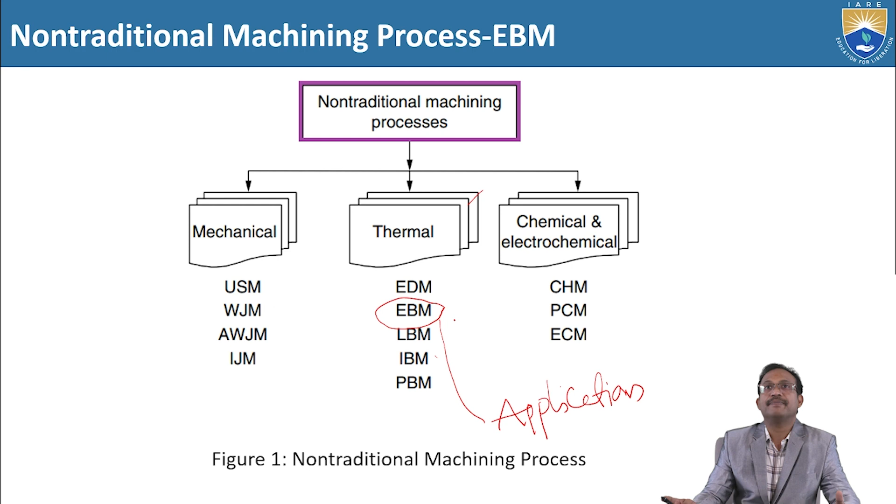Now we are in electron beam machining. Today we are discussing the applications of electron beam machining, which is under the category of thermal non-traditional machining process. So here we are discussing the applications of electron beam machining. Before we discuss the applications, let us discuss the factors affecting the performance of EBM. Subsequently, we discuss the applications of electron beam machining.

Workpiece material properties such as boiling point and thermal conductivity play a significant role in determining how readily they can be machined. So here the machining is a function of two main things: one is boiling point, the other is thermal conductivity of the workpiece material. Next, other thermal properties such as electrical conductivity are considered as additional factors. So the first one is boiling point and thermal conductivity, and the second one is electrical conductivity. These two will play an important role in the performance of electron beam machining.

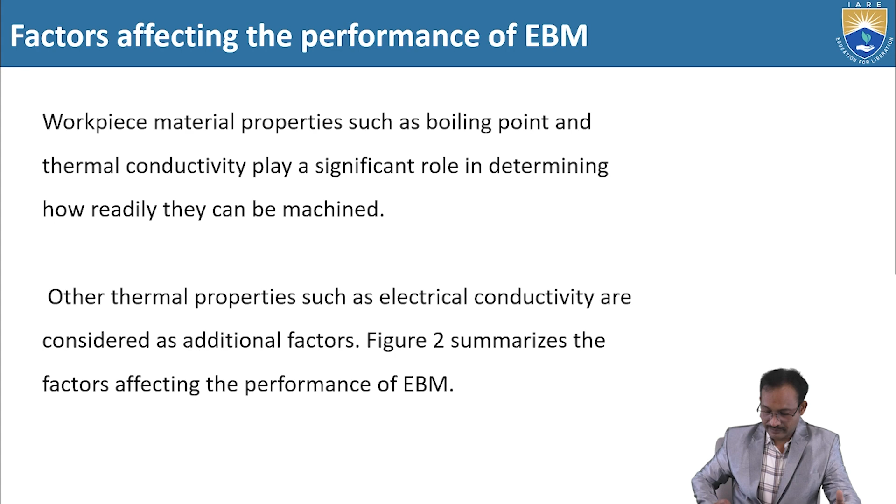These are the parameters affecting EBM performance in detail. Under electron beam machining, removal rate, surface quality, and accuracy are the main outputs. These are the different parameters which influence the performance of this electron beam machining in removal rate, surface quality and accuracy.

Now let us see the working material. Under thermal properties: thickness, ceramic and superalloy. These are the different working materials that can be considered for electron beam machining.

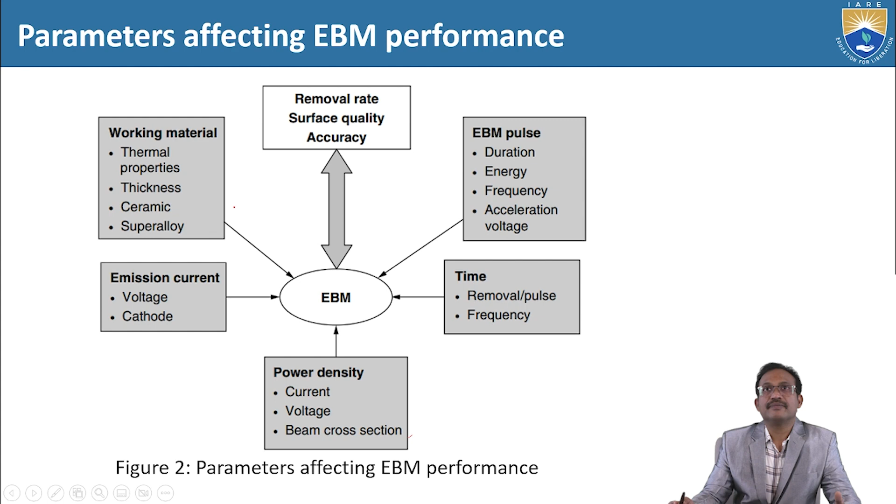Next, emission current, voltage, cathode. Power density, current, voltage, beam cross section, EBM pulse, duration, energy, frequency, acceleration voltage. These are the various parameters associated with EBM pulse, regarding time, removal and pulse frequency. So these are the various parameters affecting electron beam machining performance.

Now let us come to applications of electron beam machining. These are the applications: drilling, perforation of thin sheets, slotting, and integrated circuit fabrication. So these four are the important applications of electron beam machining. Along with these, some other applications are also there, but these four are very much important.

Now let us discuss the first one, drilling. Various researchers and authors have described and expected these to be important outcomes in the research. Steigerwald and Mayer during 1967 considered that for successful application, improved reproducibility, greater working speeds, and deeper holes of accurately controlled shapes are all needed.

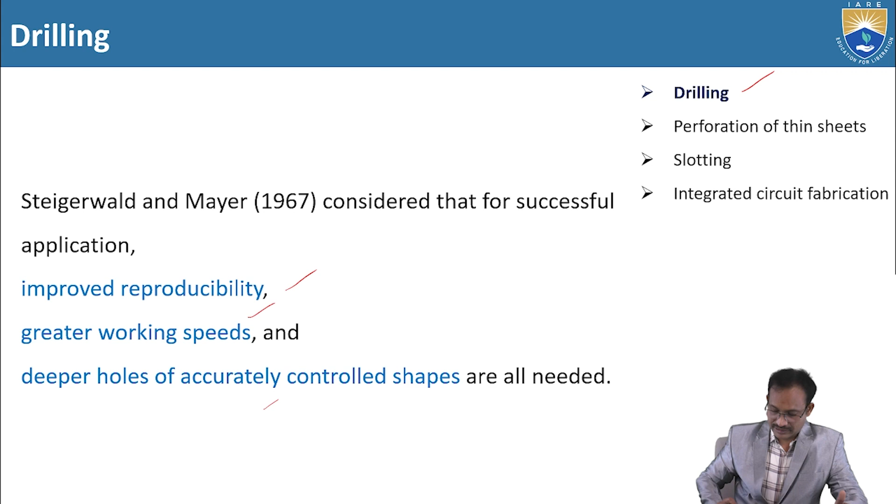During 1983, Boehme discussed drilling applications with an electron beam machining fitted with a system for numerically controlled NC. So here electron beam machining is connected with numerically controlled equipment to control beam power, focus and pulse duration, and mechanical motion. So electron beam machining is equipped with a numerically controlled setup to control the beam power, focus and pulse duration, and mechanical motion.

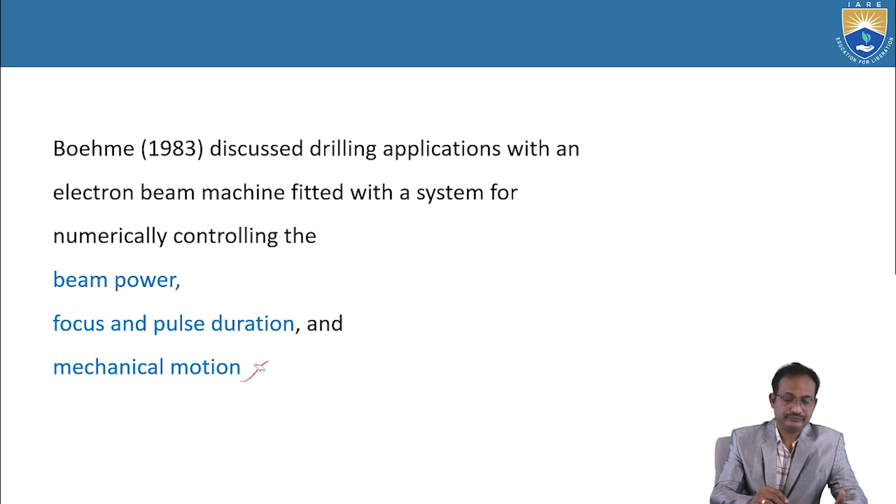Regarding hole shapes, different shapes like cylindrical, conical, and barrel shaped holes of various diameters can be drilled with consistent accuracy at rates of several thousand holes per second. That is the efficacy of the electron beam machine. At the same time, the accuracy is consistent, and we can obtain various diameters of holes with shapes that may be cylindrical, conical, and barrel shape. This is an important feature of electron beam machining: different diameters of holes, accuracy, and a large number of holes in less time. You can imagine the efficiency and productivity of electron beam machining and its performance.

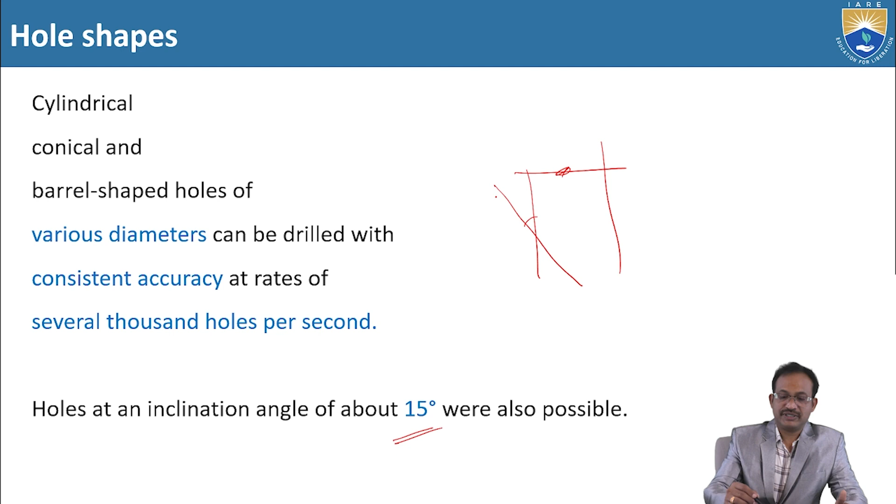Let us see some more important points by Boehme. During 1983, Boehme claimed that the largest diameter would be 1.5 mm. The depth of holes can be accurately drilled by EBM up to 10 mm. So here the largest diameter can be 1.5 mm and the depth can be 10 mm.

Aspect depth to diameter ratio is normally in the range of 1 is to 1, to 1 is to 15. What is this, aspect depth to diameter ratio? It will be in the range of 1 is to 1 to 1 is to 15 under normal conditions. For deeper holes, the aspect depth to diameter ratio will be 2.5 to 7.5 mm. I reiterate this aspect depth to diameter ratio for normal conditions and for deeper holes: normally 1 is to 1 to 1 is to 15, and for deeper holes 2.5 to 7.5 mm. Hope you understand the aspect depth to diameter ratio normally and for deeper holes.

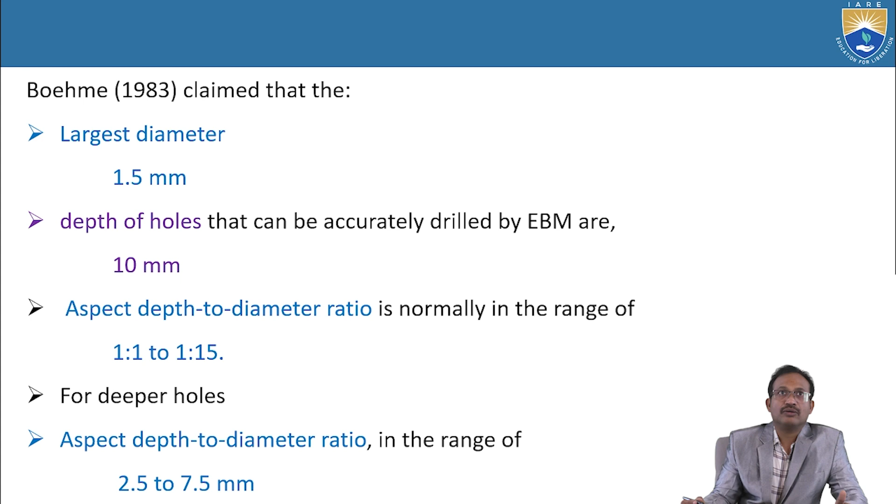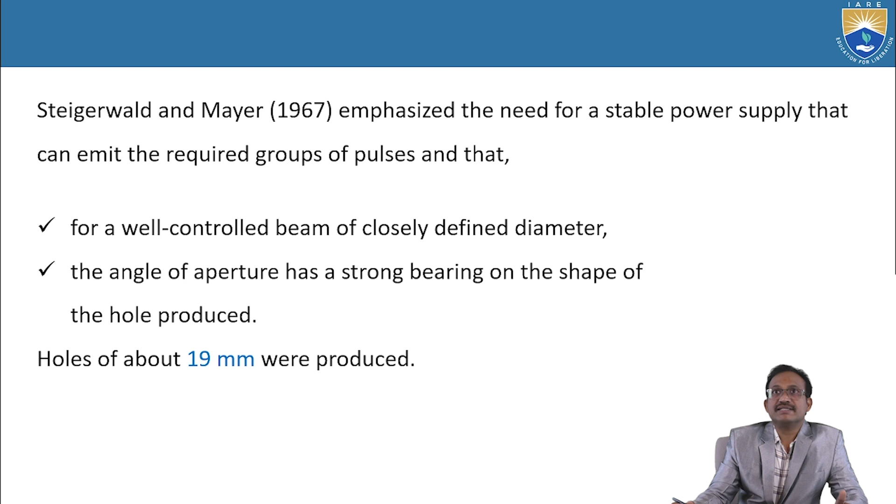During 1967, Steigerwald and Mayer emphasized the need for a stable power supply that can emit the required groups of pulses for a well-controlled beam of closely defined diameter. Second, the angle of aperture has a strong bearing on the shape of the hole produced. These are two important parameters of this machine. Holes of about 19 mm were produced, as concluded by Steigerwald and Mayer.

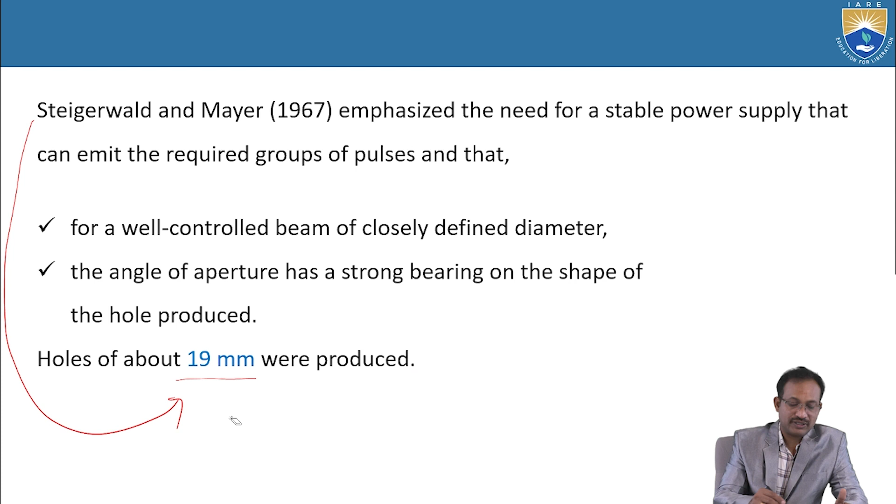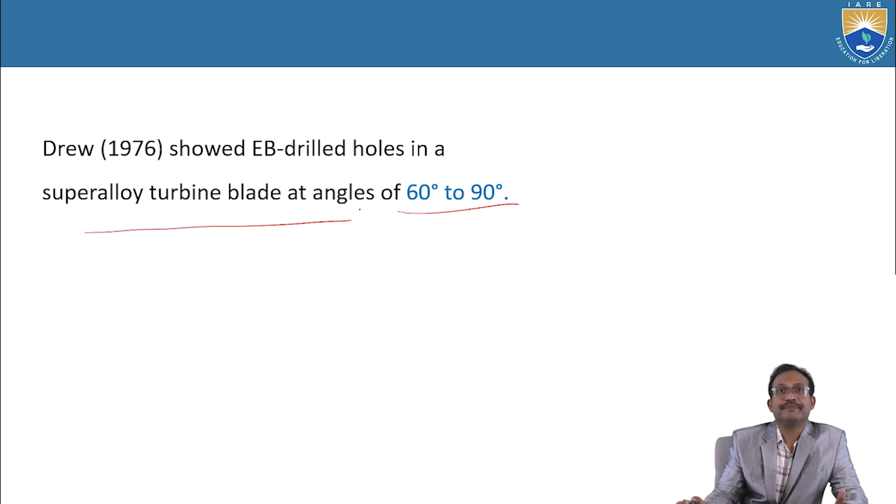Another researcher, Drew, during 1976 showed electron beam drilled holes in a superalloy turbine blade at an angle of 60 to 90 degrees. Earlier we saw that 15 degree holes can be made; now in 1976, Drew experimented and facilitated making holes with an angle of 60 to 90 degrees on a superalloy turbine blade. This is an important application for turbines.

Now drilling is over. The second application is perforation of thin sheets. For perforation by EBM to be economically acceptable, 10 power 4 to 10 power 5 holes per second have to be produced. That means 10,000 to 1 lakh holes per second on thin sheets. Thus, single pulses lasting only a few microseconds are needed. Within a few microseconds we can produce so many holes. Per second, not per minute, we can produce 10,000 to 1 lakh holes.

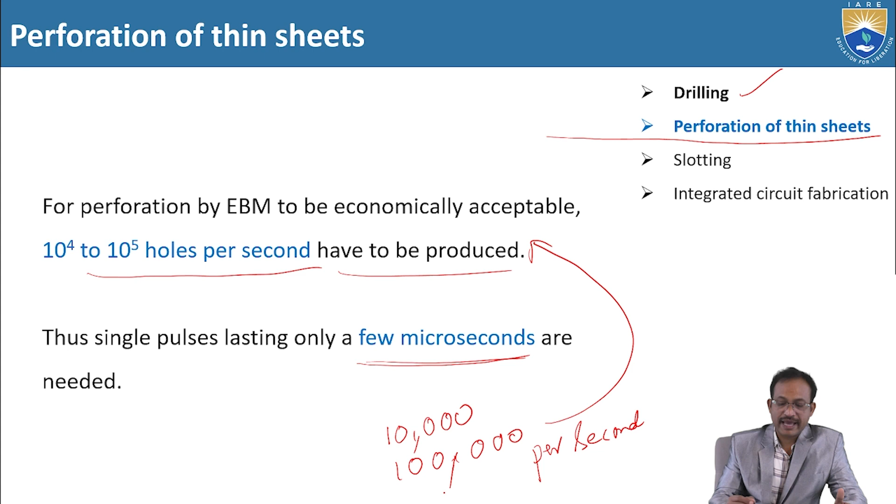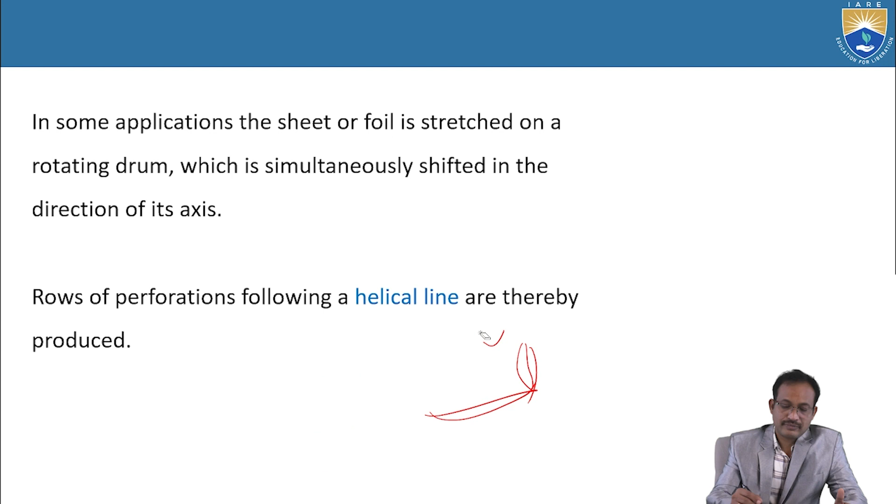In some applications, the sheet or foil is stretched on a rotating drum, which is simultaneously shifted in the direction of its axis. When we stretch the sheet on a rotating drum, rows of perforations following a helical line are thereby produced, row by row.

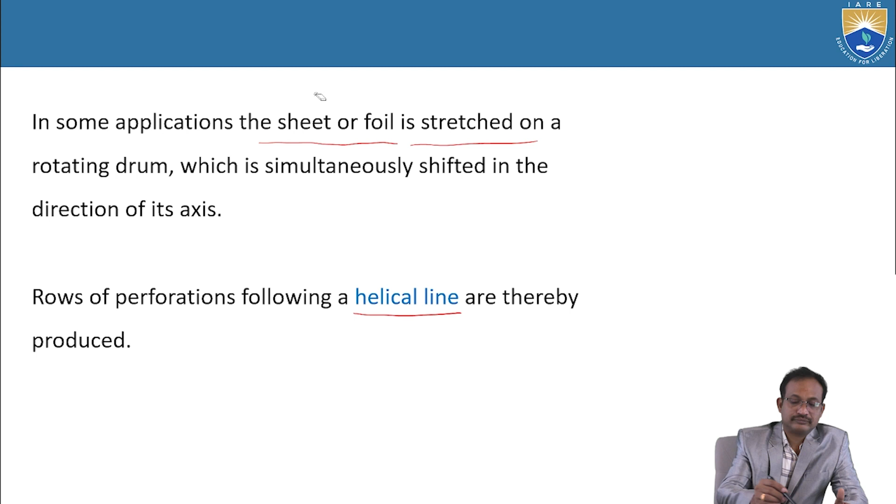Manipulators, meaning the robotic setup capable of linear and rotating movements in 4-axis, are used for electron beam machining perforation of jet engine components. So here is a 4-axis robotic setup.

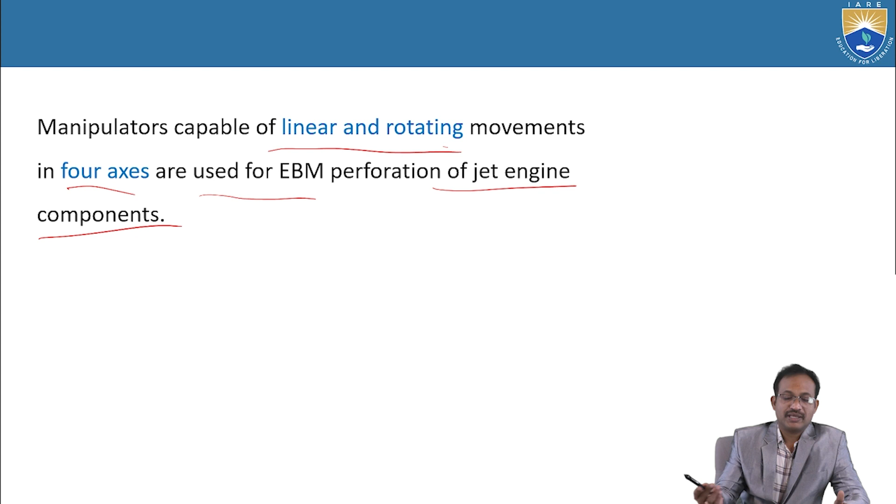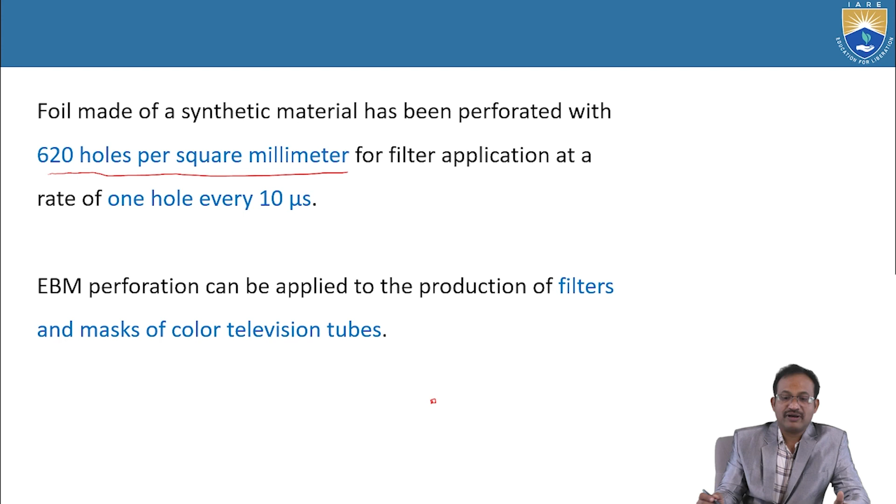This is an important application for perforation of sheets. Foil made of a synthetic material has been perforated with 620 holes per square millimeter for filter application, at a rate of 1 hole every 10 microseconds. One square millimeter is almost just a dot, and within that tiny area there are 620 holes. Can you imagine? The application is filtering, and in 10 microseconds 1 hole is produced.

EBM perforation can be applied to the production of filters and masks of color television tubes. So for color TV tubes, filters and masks are produced with this EBM perforation.

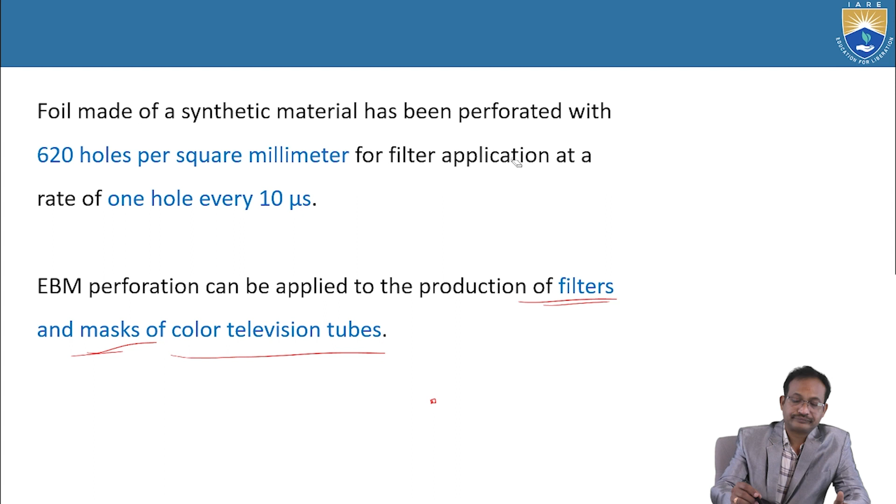Other applications for perforation lie in sieve manufacture for sound insulation and in glass fiber production.

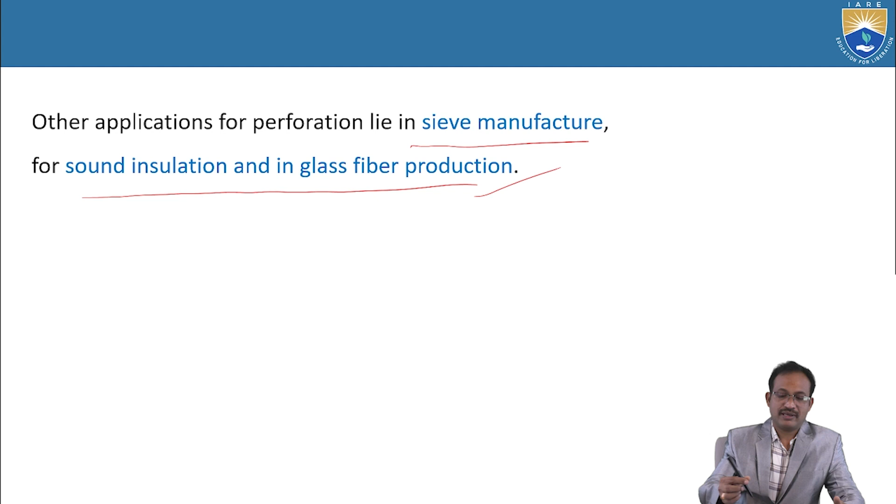Next one is slotting. Third one is slotting. Perforation of thin sheets is over. Now slotting.

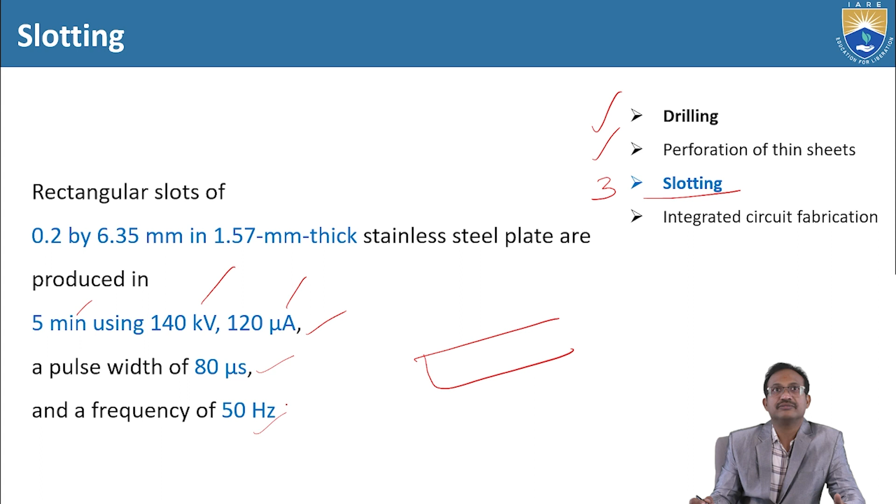Rectangular slots of 0.2 by 6.35 mm in 1.57 mm thick stainless steel plates are produced in 5 minutes using 140 kV, 120 microamperes, this is voltage, this is current, this is time, with a pulse width of 80 microseconds and a frequency of 50 Hz. So here is rectangular slotting: the thickness is 1.57 mm, one dimension is 0.2 mm and the other is 6.35 mm. The stainless steel plates are produced in 5 minutes using these parameters: the slot width is 0.2 mm, the slot length is 6.35 mm, and the slot thickness is 1.57 mm.

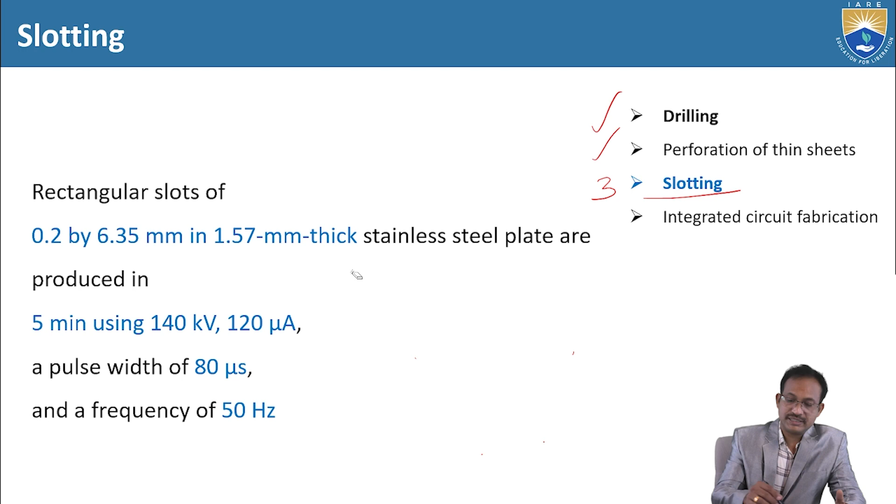This is exaggerated for illustration. This is about slotting. Again, we'll see the other things.

The rate of slotting depends on the workpiece thickness. So the rate of slotting is a function of the workpiece thickness.

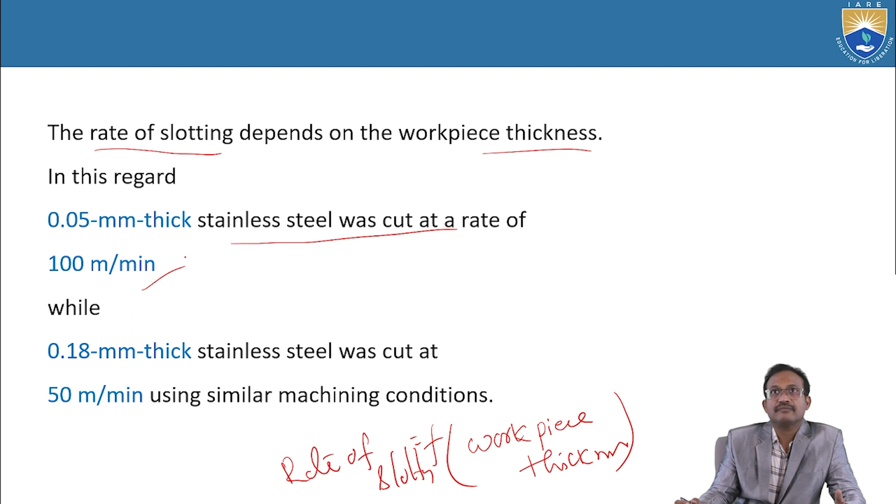In this regard, 0.05 mm thick stainless steel was cut at a rate of 100 meters per minute, that is 100 meters in 60 seconds. While 0.18 mm thick stainless steel was cut at 50 meters per minute using similar machining conditions. So when the thickness is 0.05 mm, the rate is 100 meters per minute, but if we increase the thickness from 0.05 to 0.18 mm, the slotting rate drops to 50 meters per minute under the same machining conditions.

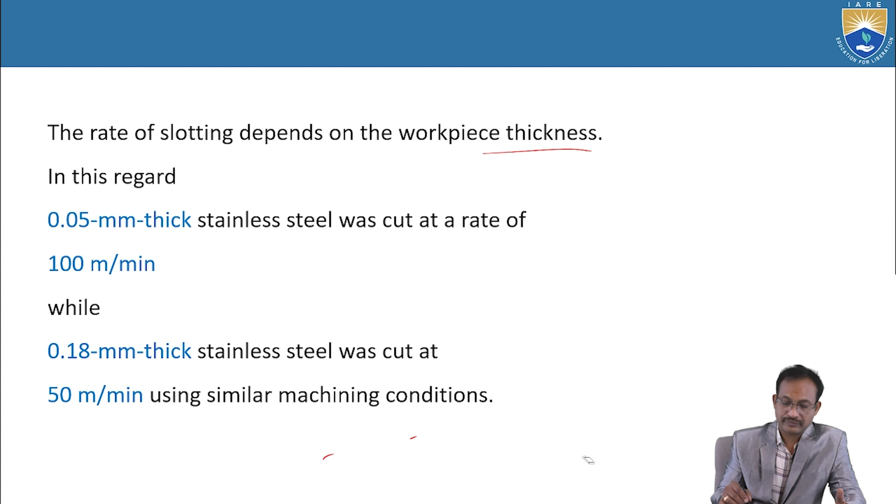Now we'll see integrated circuit fabrication. Now we are discussing integrated circuit application.

In the year 1967, Birnie and Champney drew attention to the use of electron beam technology in scribing thin film circuits for the electronic industry.

This is where integrated circuit fabrication has come up with this application. A detailed account for the manufacture of integrated circuits (ICs) has been presented by Yew et al. during 1994, with complete application performance.

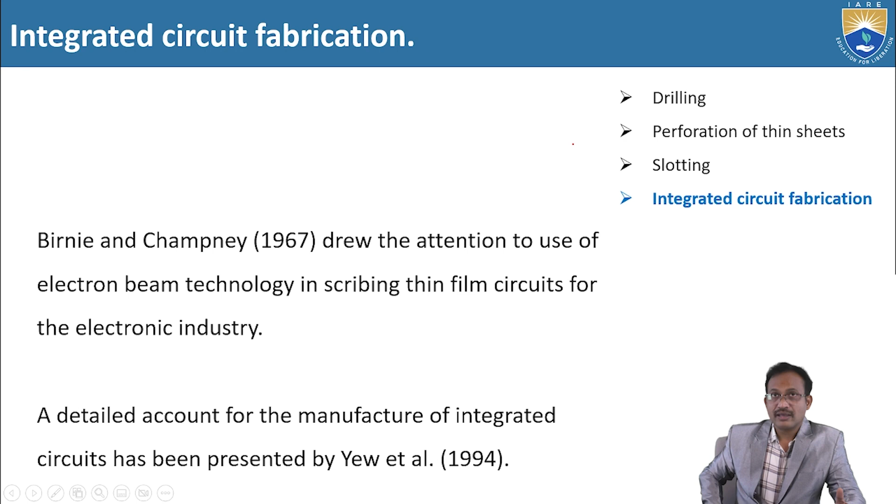The beam is positioned accurately by means of deflection coils at the location where a pattern is to be written, by exposing a film of electron resist coated on either a chrome mask blank or wafer, for the production of the lithographic definition required.

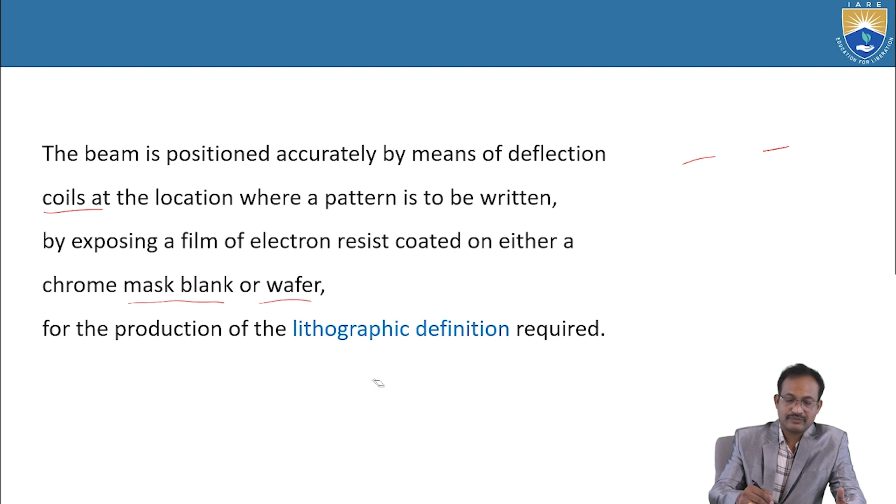An electron beam of energy about 10 to 20 keV can either break the bonds between the polymer molecules or cause cross-linking in the polymers, at this 10 to 20 keV range.

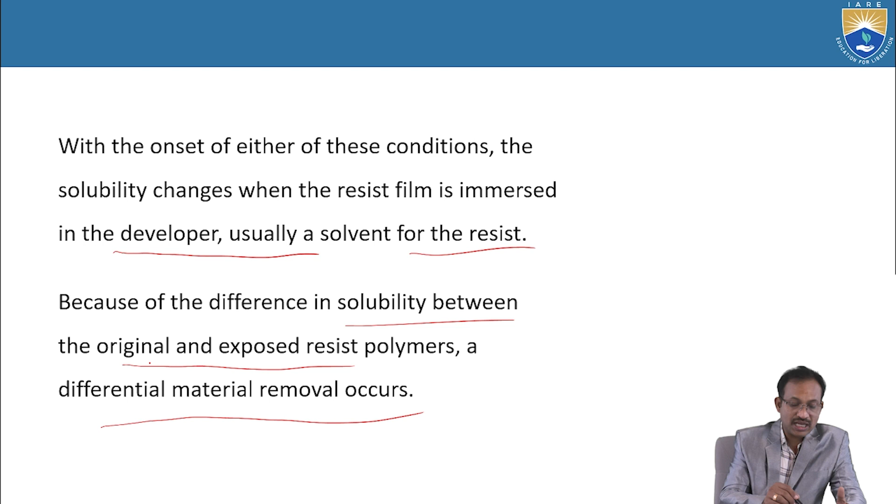With the onset of either of these conditions, the solubility changes when the resist film is immersed in the developer, usually the solvent for the resist. Because of the difference in solubility between the original and exposed resist polymers, a differential material removal occurs.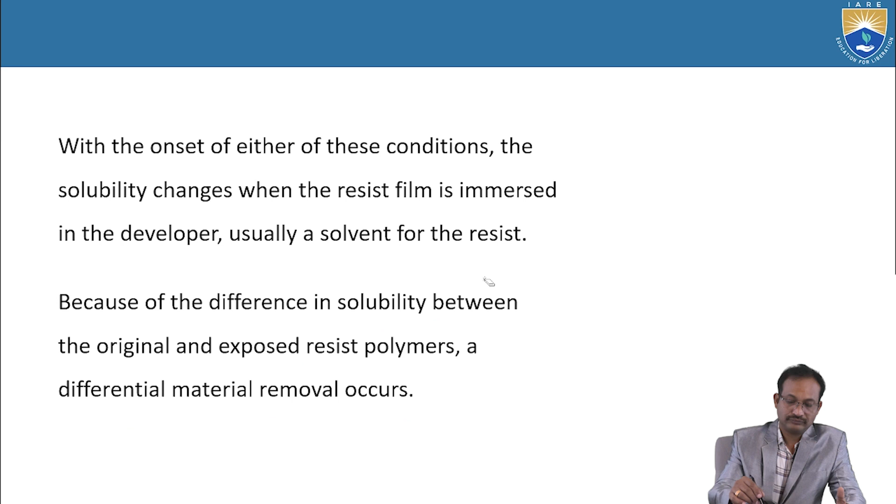A fine pattern of polymer is thus obtained, which is used as an active mask to avoid unwanted etching of the integrated circuit mask.

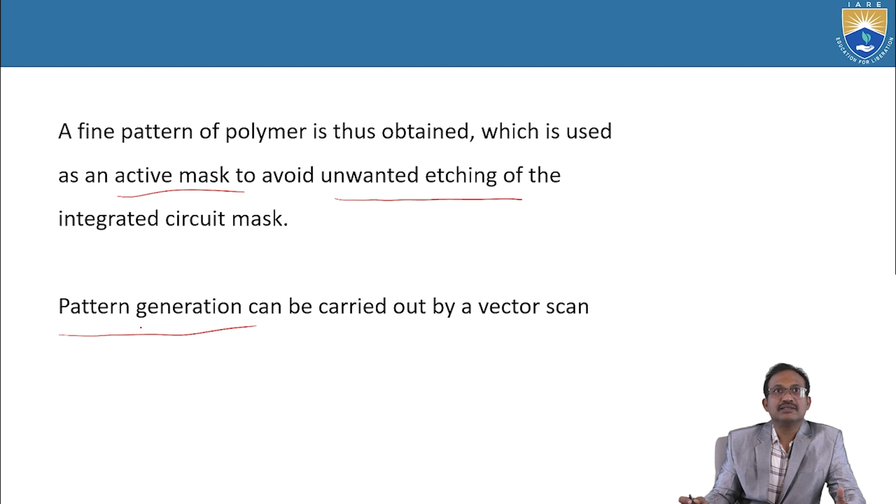Pattern generation can be carried out by a vector scan system. The electron beam is deflected only to the locations at which the electron resist is to be exposed. As soon as the deflection system completes positioning the beam at the required place, the electron beam action is started.

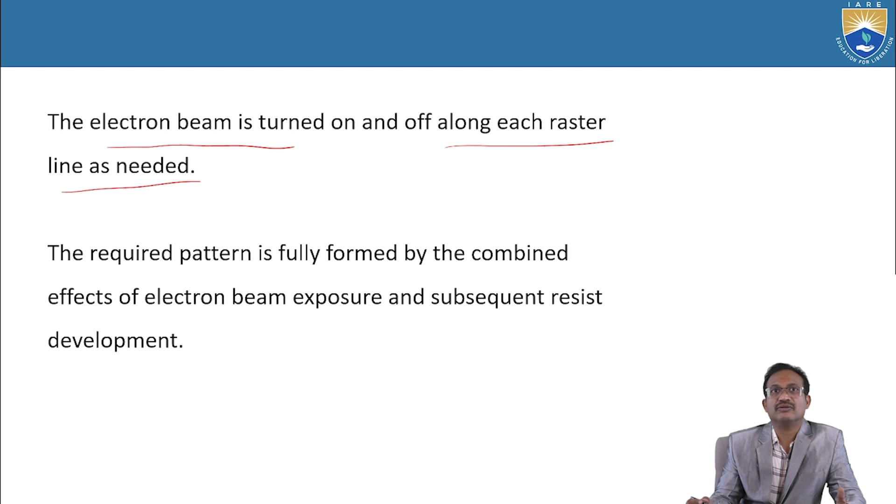With the raster scan method described by Megoff during 1988, the chip pattern is divided into subfields. The electron beam, in a raster like that employed with television, scans each subfield. The electron beam is turned on and off along each raster line as needed, similar to what we see in televisions.

The required pattern is fully formed by the combined effects of electron beam exposure and subsequent resist development — one being electron beam exposure, the other being the resist.

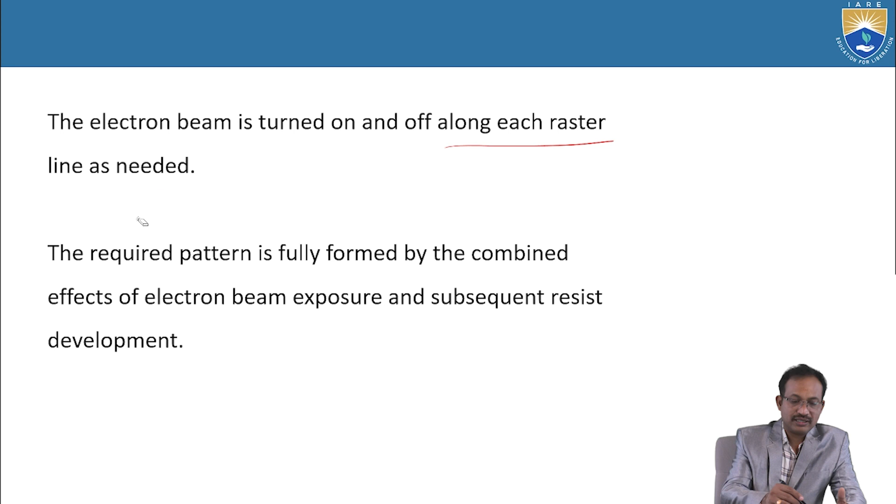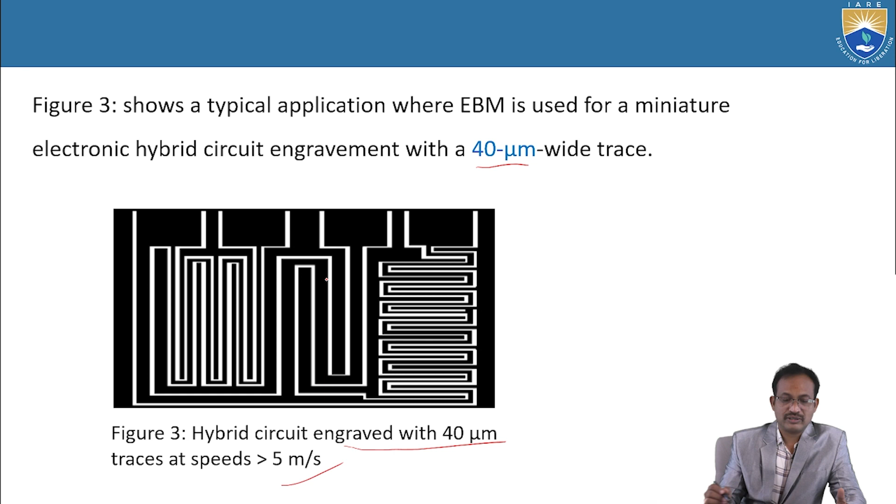Figure 3 shows a typical application where electron beam machining is used for a miniature electronic hybrid circuit, engraved with 40 micrometer wide traces at speeds greater than 5 meters per second. This is the architecture of this circuit.

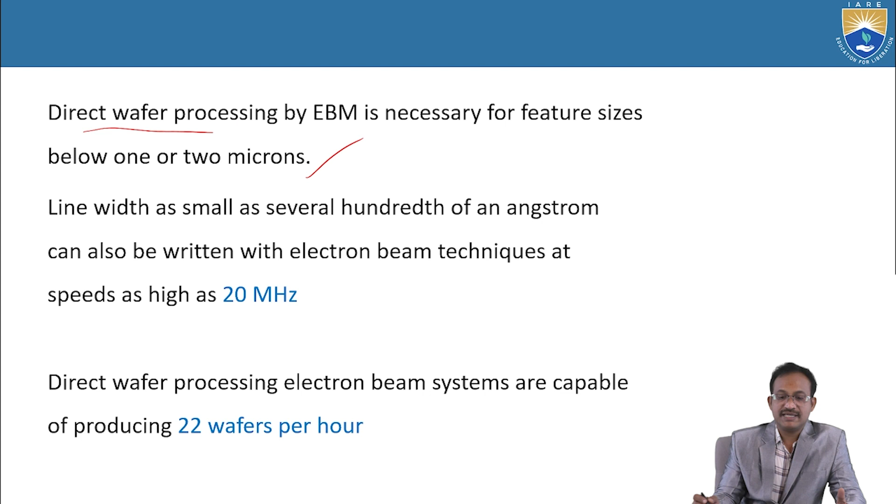Direct wafer processing by EBM is necessary for feature sizes below 1 or 2 microns.

Line widths as small as several hundredth of an angstrom can also be written with electron beam techniques, at speeds as high as 20 megahertz.

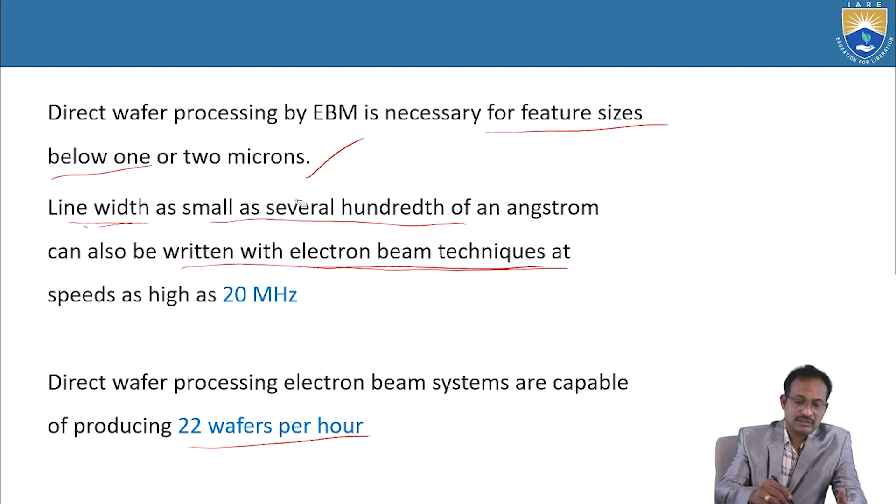Direct wafer processing electron beam systems are capable of producing 22 wafers per hour. With this, we have completed almost all the applications.